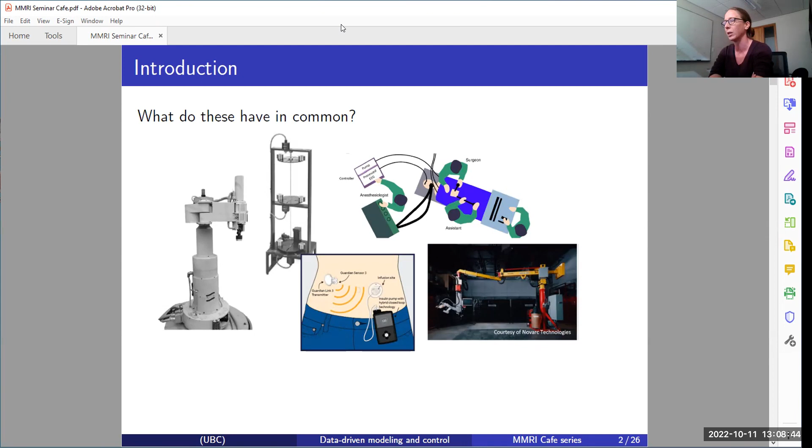So on the left here, we see an industrial robot and a lab setup. Actually, the second one here is a lab setup that is often used. It's a flexible mechanical system which exhibits some control challenges that are very common in mechatronic systems with resonances. And then in the middle here we have an artificial pancreas. This one I think is actually from Medtronic, is actually on the market at the moment. In the top corner, a picture reflecting automated anesthesia, and then in the bottom a welding robot. And so my research is on feedback control, on control systems technology, and this is enabling technology.

It's often been referred to as hidden technology, in the sense that it's present in a lot of different industrial systems, in the process industry, and also in consumer products. But it's often essential to the functioning of the system, or at least to the performance that the system can achieve, but it's hidden to the end user, therefore often called hidden technology. And the specific feedback and control technology that my expertise is in is using data to either enable or improve the performance of such feedback systems.

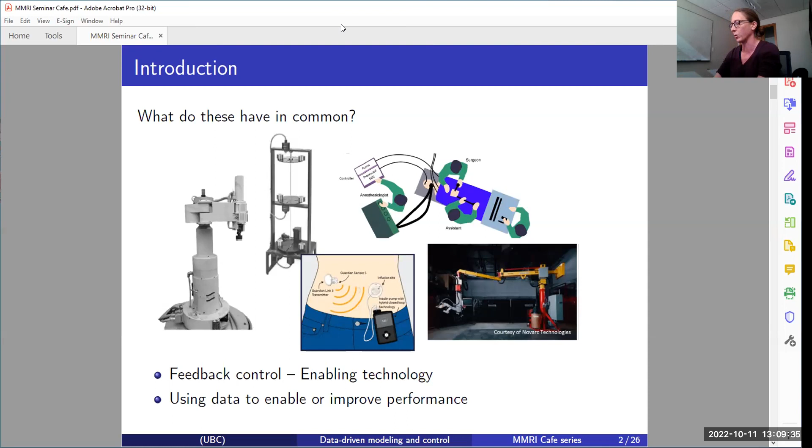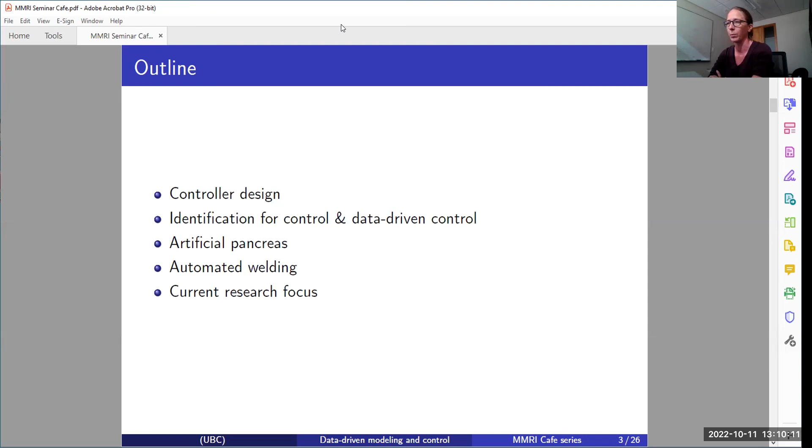So what I'll talk about today is I'll give a bit of a broad introduction to control system design and feedback for those of you who are less familiar with this field, and then an introduction into identification for control and data-driven control. And then, despite the title, I actually won't talk about anesthesia, but I decided to talk about the artificial pancreas instead, because I think the work that I did on the artificial pancreas is a really good example of what I'm trying to talk about here today. And I also realized that I don't think I've actually ever presented this work other than in the published publication. And then I'll talk about some more recent work on automated welding.

So when I talk about feedback or closed loop control, this is what I'm talking about. We have a system. Can you see my mouse? A system, in this case, in closed loop anesthesia, it's actually the patient who is receiving drugs that bring in a state of hypnosis that allows for a procedure to happen. And what we want to do is actually control that depth of hypnosis as well as possible. So this is our system, in this case, the human.

So we'll have to be able to measure what the effect is of our intervention, in this case, the drug delivery. So we need a sensor that, in this case, measures the depth of hypnosis. And the signal or the feedback from that sensor then goes into our control algorithm, and the controller somewhat decides what the change or the next infusion should be. And to actually make that change in our real system, we need an actuator. So in the case of closed loop anesthesia, we have a pump that actually delivers that amount of drug to the patient.

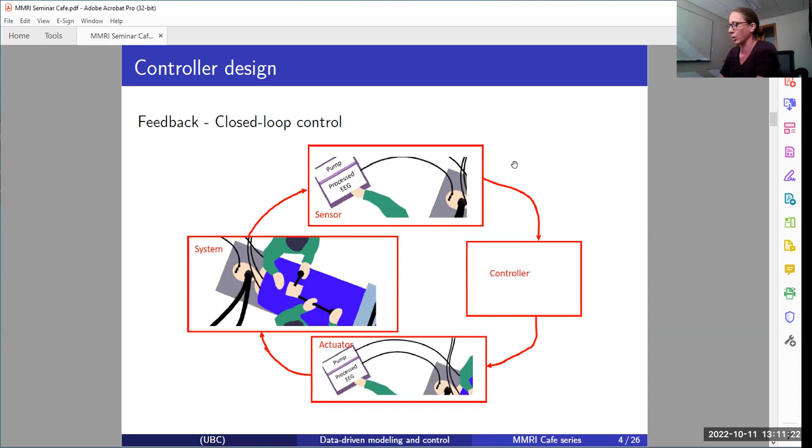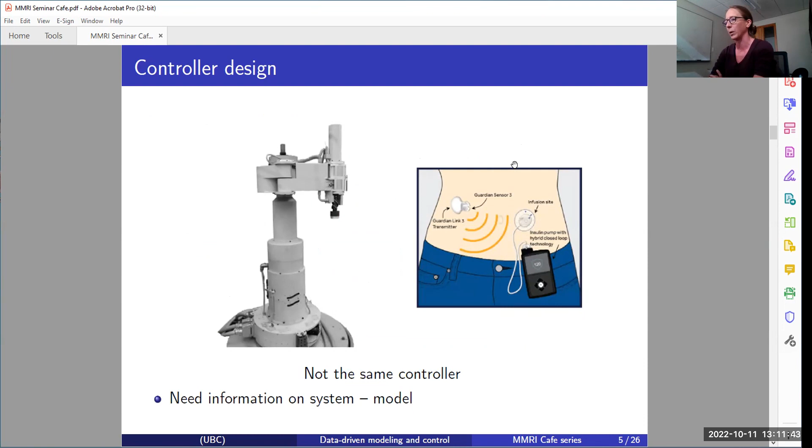And as I said, it's enabling technology. The technology is roughly the same for a wide variety of systems, but obviously if you have an industrial robot like this or an artificial pancreas, you cannot get away with the same controllers. So we're going to need some information on the system to be able to design that feedback system. And this is often a model. And then you can try as hard as you want, but you're never going to capture the complete dynamics up to 100%. And this is particularly true in these medical applications where there's so much uncertainty. But this is also true in high precision systems.

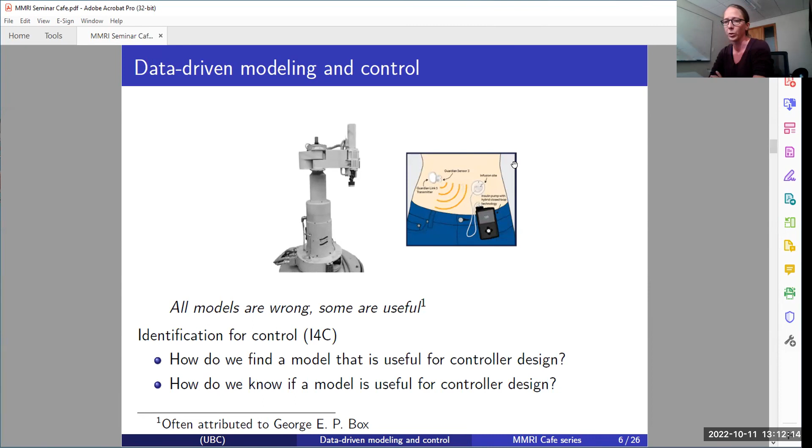And this is where identification for control comes in. The field is a subfield of system identification, which deals with questions as to how do you find a model that is useful for controller design, or how do we know if a model that we have is actually going to be useful for controller design. And so the standard approach to controller design would be model-based, where either using first principles or using data, we define a model of our system, and then you often have some kind of control criteria that you try to optimize or minimize. And then this could be an optimization step that then leads to the controller.

And just to clarify, because data-driven techniques and learning are used very widely these days. So to narrow that down a little bit, what I'm talking about here is often a black box structure, but with a very limited parameterization for the model. We can often get away with discrete time dynamical models that are described by difference equations. So the model structure here is relatively limited with a limited number of parameters and often linear.

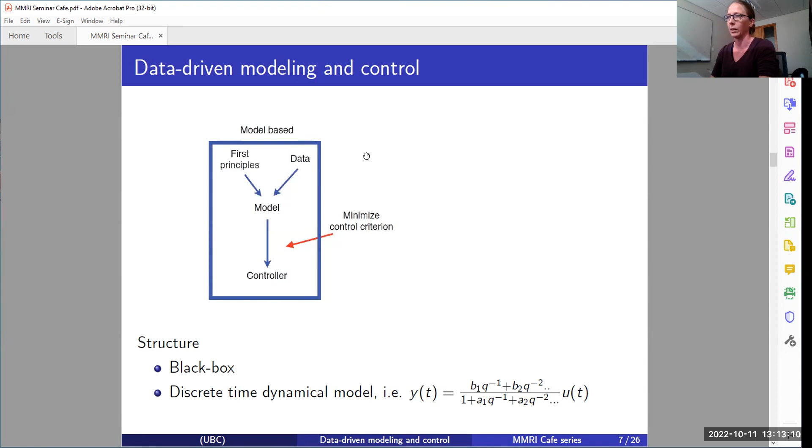So the problem if you do this, specifically if you go from data to a model, this would be a learning step or an identification step using optimization. You come up with an approximate model, and there's going to be some modeling errors. And now if I use that approximate model, where I've lost some of the information that was in my data, to minimize my control criterion, then the performance that I'm going to achieve on the actual system isn't going to match my designed performance. So any modeling errors in the model are going to affect the performance of my ultimate controller.

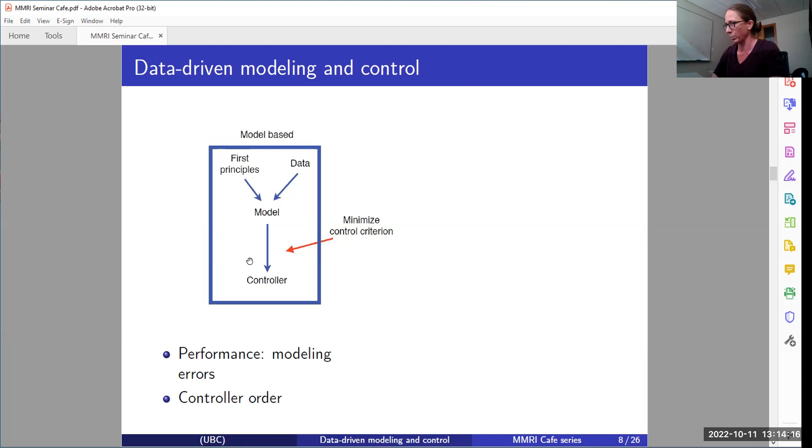And then another problem with this approach is that you can make this approximate model more and more accurate by making it more and more complex if you have the data for that. But often, due to the methodology to design a controller, the complexity of this controller depends on the complexity of this model. So we actually often want a simple approximate model because it'll give us a simple control.

If I then talk about data-driven control, that actually gets rid of both of these problems because now instead of having data-driven modeling, I'm going to do data-driven control, where I use my data directly to optimize over this control criterion and to directly find this controller. So I'm avoiding this modeling step altogether, thereby avoiding any modeling errors. And because I haven't imposed any intermediate structure on that model, I'm also not generally restricted in the complexity of my controller.

You do run into a couple of issues though, such as stability, because in the standard approach, we have a model here in the middle, and even if it's approximate, we have an idea of how good it is, and we can use standard stability analysis and robustness margins to evaluate whether that controller is going to work in real life.

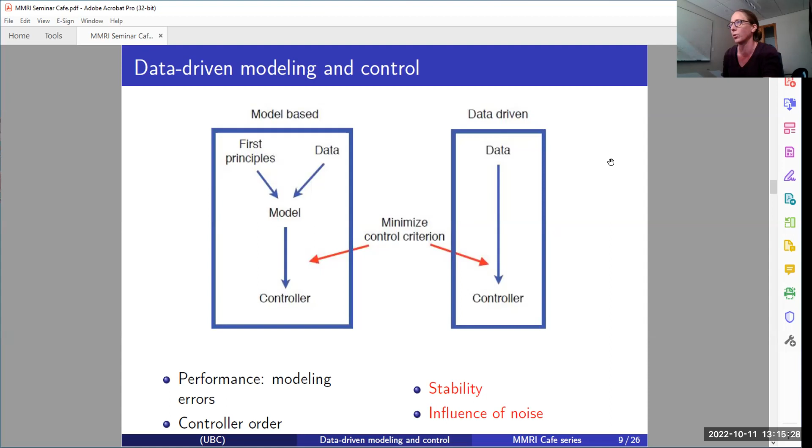In our data-driven approach, we don't have that model anymore. So how do you guarantee stability? And then the second issue is that the noise will affect this optimization problem a little bit differently than the original data-driven modeling approach. So those are two things that I worked on in my PhD, where I proposed a data-driven controller design technique that can guarantee closed-loop stability.

So if we go back to this model-based approach, why are these modeling errors such a big issue, specifically in feedback control? And the reason is that it's actually really not straightforward to evaluate what the impact of a modeling mismatch or what the impact of uncertainty is on closed-loop behavior.

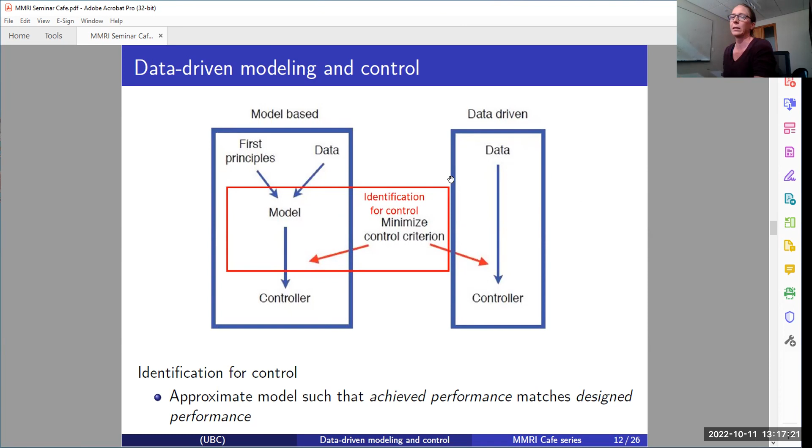And so this is where identification for control comes in. So this modeling step here actually also takes this control criterion into account and optimizes this approximate model for that specific objective of feedback control. And so here the goal would be to find an approximate model such that the performance that you achieve on the real system matches what you had designed. And again, this is not really necessary in the data-driven approach because we don't have an approximation there in the middle.

And this model accuracy is critical, first of all, in these high precision and mechatronic applications where you're pushing the limits of performance. But it's also very critical when the uncertainty and variability is high in the biomedical application. So that really is how all these different applications tie together. And then the third one, for systems where accurate modeling is too expensive or too difficult, this is often a motivation that is used for developing data-driven control techniques, and this field is gaining a lot of traction again in the last few years. It's a little bit debatable, depending on the structure that you use, whether that argument really holds in my mind.

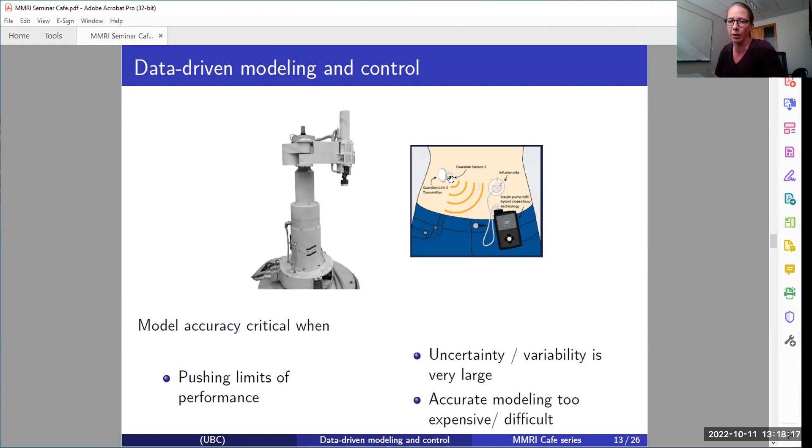So how does this apply to highly variable systems? I worked at the University of California in Santa Barbara for a little while on the artificial pancreas, which is an automated system for individuals with type 1 diabetes. So in individuals with type 1 diabetes, their pancreas no longer makes insulin, and insulin is what moves the blood sugar to the cells. So if you cannot make insulin, you cannot control the blood sugar anymore.

And so in this graph on the top here, you see a 24-hour blood glucose reading of a healthy individual where the blood glucose is controlled really tightly, versus somebody with diabetes, where we're kind of all over the place. And particularly these highs here, above 200, 250, are detrimental to the long-term health, and long-term high glucose causes some of the well-known long-term effects of diabetes.

Whereas these lows here, if you go below 50 particularly, are more of a short-term worry, because that can lead to coma and even death.

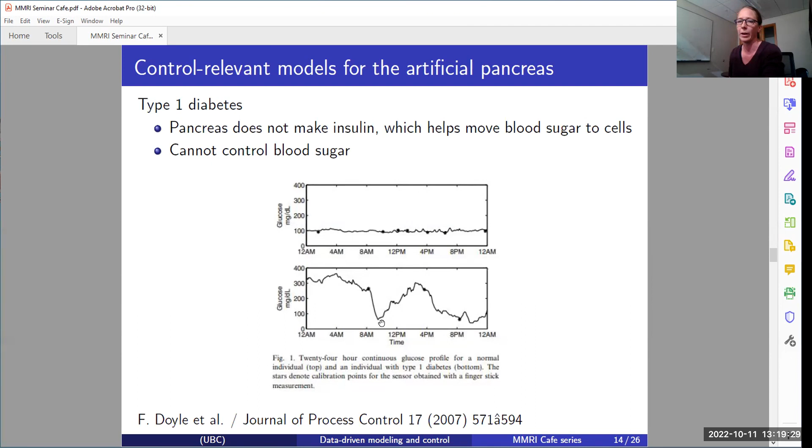And so automating insulin delivery for these patients has proven quite difficult, partly because of challenges in hardware and challenges in measuring glucose in the blood, which is often indirectly measured, not in the blood. But another big obstacle is that to design those algorithms, you would need a model. And the system is really hard to model.

So first principle models are not accurate for individuals. They're also too complex for controller design. And at the same time, clinical data is not informative. So you can't actually do very much in terms of model learning. And the reason is visible here in this graph.

So here in the top graph, we've got the blood glucose. And here we have the meal intakes. And here we have the insulin doses. So the meals are given at the exact same time as the insulin, which pretty much makes it impossible to distinguish the effect of glucose intake from the effect of insulin intake. And it would be ethically unacceptable to separate those too much, because it would cause insufficient glucose control.

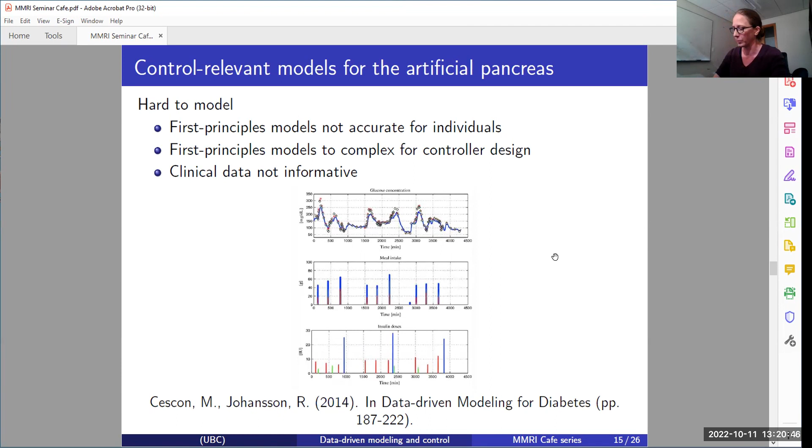So we have an over approximation of the gain and an over approximation of the phase shift, which means that if I'm going to use this model in a controller design, I know that if I use it on the real patient, my robustness margins are going to be met, meaning that patient safety is not a worry. And that's indeed exactly what it did. If you use these models instead of what was the prior state of the art, you can increase safety without compromising performance.

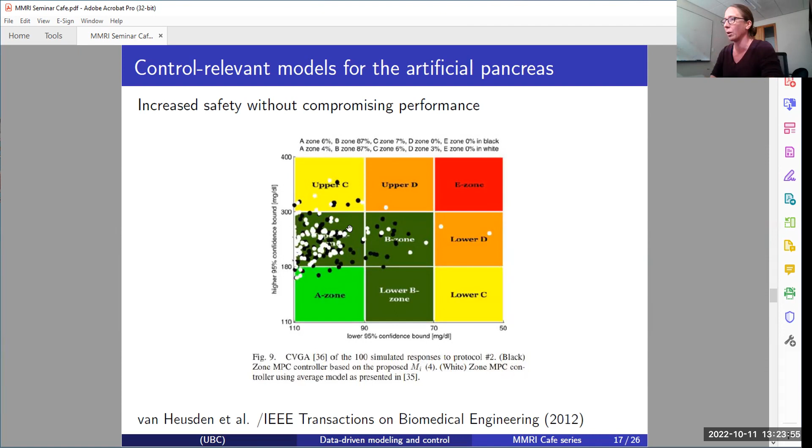So I wanted to shift gears a little bit to much more recent work, maybe more closely related to the interest of some of the listeners here. It's in automated welding, and automated welding is not new. It's widely used, think of automotive, 30, 40, 50 years maybe since the first welding robots.

Characteristics of the systems and the applications where it's been really successful is low mix, high volume, meaning that every single product is very much the same. All the parts are very close to specs, and we're making a lot of them, which means that pre-programmed robotics is worthwhile there, because you can spend a lot of time and effort programming the robots to weld from A to B for every single piece, and that would actually work.

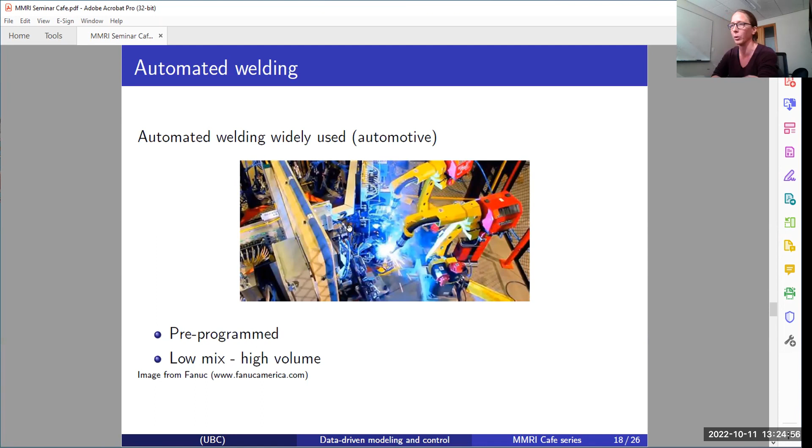There's been really interesting developments in robotics, particularly in collaborative robots, that now make it possible to automate processes that were previously not worthwhile automating, because you can use these collaborative robots with a human really close to the robot, where the human can help, for example, in welding, do all the positioning, which would be really hard to automate. And then once the positioning is done properly, the robot can take over and automatically weld.

And one of the characteristics here is that two pieces of pipe are put together manually. Tacks are put on, but they're attached manually, which means that there's actually quite a wide variability in the width of the seam that you're trying to weld, and also in the exact dimensions of that seam. And then in addition, the pipes will be attached to a positioner in a way that might be slightly off-centric. So you get additional variability in there.

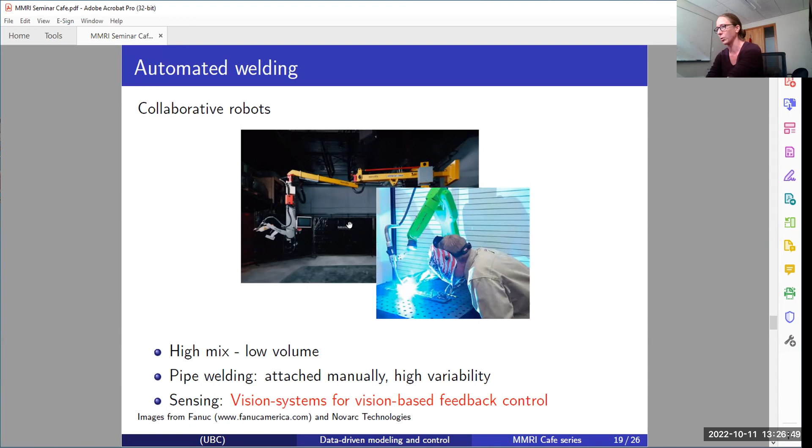And to increase the level of automation in some of these applications, one of the bottlenecks is sensing. And so there's a lot of research going on and a lot of interesting advances and successes using vision systems for vision-based feedback control. And so one of the first things you need if you want to make a high quality weld is to control the position of the torch with respect to the seam, which means that you need to sense the seam location.

In this project, we were looking at fillet welds. So fillet welds are when you're welding together two pieces like this, and the weld would be in here. Now picture that that's a pipe that's rotating, and you have a camera somewhere pointing at that. There's just absolutely no way you can get a perpendicular angle on that. So you'll have some kind of funny angle that makes it quite challenging to figure out what the seam position is, because in addition, all you can see in images or even in thermal images is the melt pool, because the contrast is so high in normal visible light, and the temperatures are so high in infrared. The information you get is not great. So it's actually quite a challenging vision problem.

And in addition to that, because we're not perpendicular, if the melt pool moves at all, it might not even be possible to find that seam position from these types of images. So a student I've been working with, Mobina Mobaraki in Vancouver, has been looking at seam tracking for these fillet welds. And this work was more focused towards whether you can actually find that seam location from this type of images. And in the first attempt using machine vision, she got 61% of the images with a horizontal error of less than 0.2 millimeters.

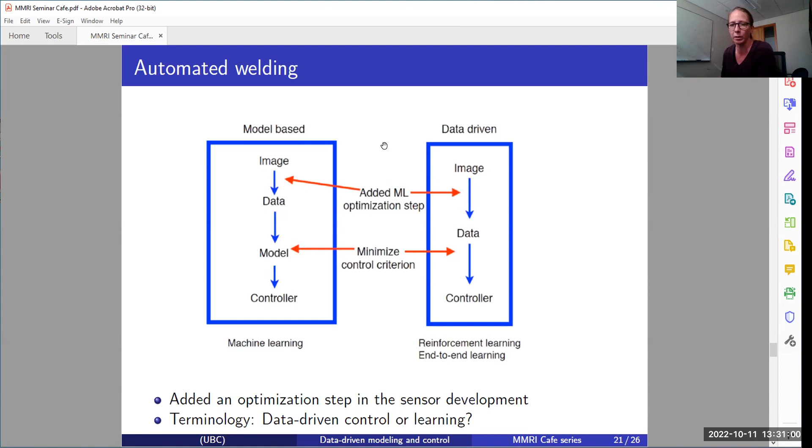And that leads me to my current research interest, which is partly in theoretical controls and algorithm development on data-driven modeling and control for safety-critical applications. And then also some applied work, data-driven control for robotics and mechatronics, which goes to this high-precision side, and then automation in agriculture, which goes to this high uncertainty side. And as I mentioned, I think any automation in agriculture and further automation in mechatronics and new applications are going to be driven by vision and by machine learning. So again, I think there are really interesting problems and really interesting opportunities.

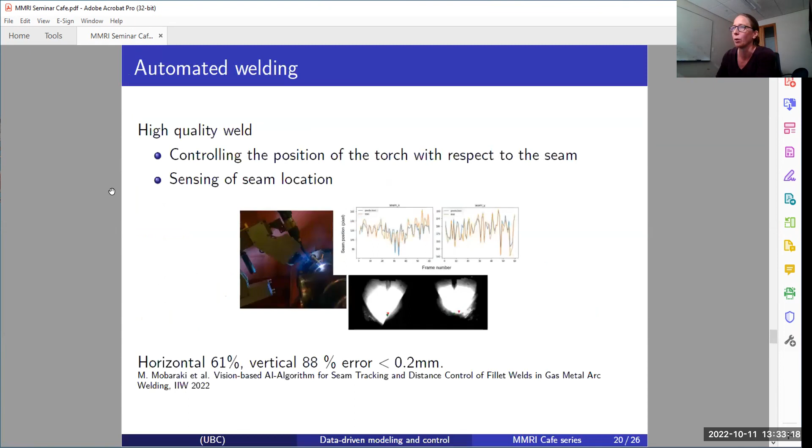Well, that's a good question. For this application, I think yes. I think there are two different answers. So in this example, if you look at the time here, it's 150 seconds, right? And here we're controlling it with, I don't know, the rise time is maybe 3 seconds, because it has some overshoot, so 2 to 3 seconds. So these are linear systems, so it depends on the frequency. So you don't need to know if a system has an integrator. As long as your controller has an integrator, it'll get rid of that error.

Does that mean you can get away with PID? That might not necessarily be the case. It actually depends on how fast you want to control this. So here this works because my closed loop system is so much faster than the predominant uncertainty here. If I would want to control this system really, really slowly, that would be dumb. You'd probably just do a slow reference instead. But if you want to decrease that closed loop bandwidth, you would run into trouble, and you would not be able to fix that with a PID either.

That being said, in our work on control of anesthesia, there's a lot of debate on what type of controller you should use. Should you use MPC? Should you use PID? And there was an article a lot of years ago where, I'm not sure if it was MPC, but something more complex outperformed PID, which is, I think, what got my supervisor in Vancouver really interested in this, because he didn't think that was the case. And so we actually ended up doing, in the last few years, some more fundamental comparisons. It's actually really difficult to compare different control methods, because the objective you're optimizing in your controller design step is usually not the same. So any comparison you make is generally unfair.

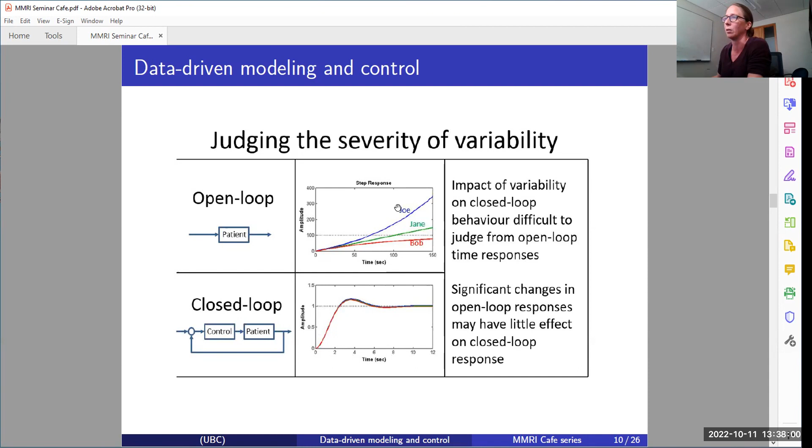Optimal path planning, safety, do you meet your safety guarantees? Especially, do you meet your safety guarantees is very, very different from feedback control. And that's one of the things we ran into here. I have really terrible low frequency gains. So I've got a really terrible idea of what's going to happen in half an hour or in an hour from now. So if I put a safety system on top of that and I use a model like this, it's not going to work. So again, I'd like to see a split and a closer focus on the methodology with the objective that the methodology is used for. I don't know if that fully answers your question.

Yeah, it does. I guess my interpretation of what you're saying is that given that it's so application specific, the use of such synthetic data sets depends on many things. Yeah, like the objective we're trying to achieve, how robust those models are, and that just changes from one field to the next. Well, yeah, and what the impact of an error in that synthetic data set is on your ultimate outcome. And I think there's a lot of interesting work to be done to decrease that gap there. Yeah, makes sense. Thank you.

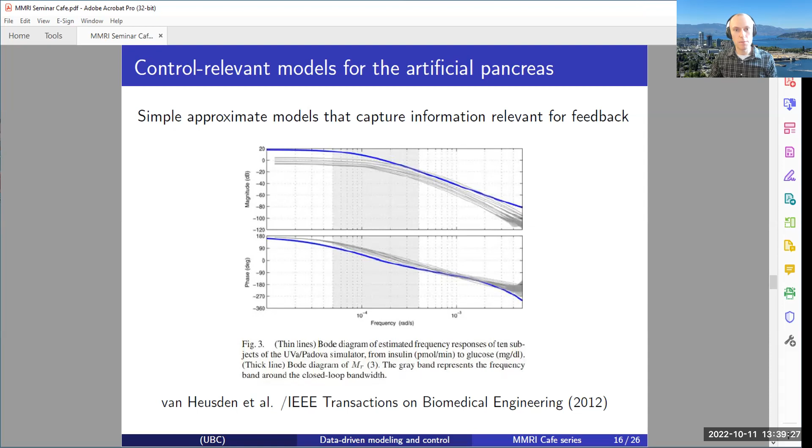Having issues with the camera. Okay. So you should be able to share your screen, Jolene. I've just given you co-hosting privileges. Is there an actual wheel, Bryn? Yes. A digital wheel. We don't have it printed out, just in the background, ready to go. Okay. So that would be more fun. Sorry, Bryn, I'm having problems with my camera. Can you guys hear me? I'm not able to hear you, Jolene. I can only hear you because you're in the same office as me, but I'm not hearing you on this call. Okay, so I'm having issues with my camera, but I have the wheel up, and if you'll entrust me, I'll give it a spin and I'll let you know the winner. Okay, Jolene will put the recipient into the chat. She's having some technical difficulties on her side. So, spinning.